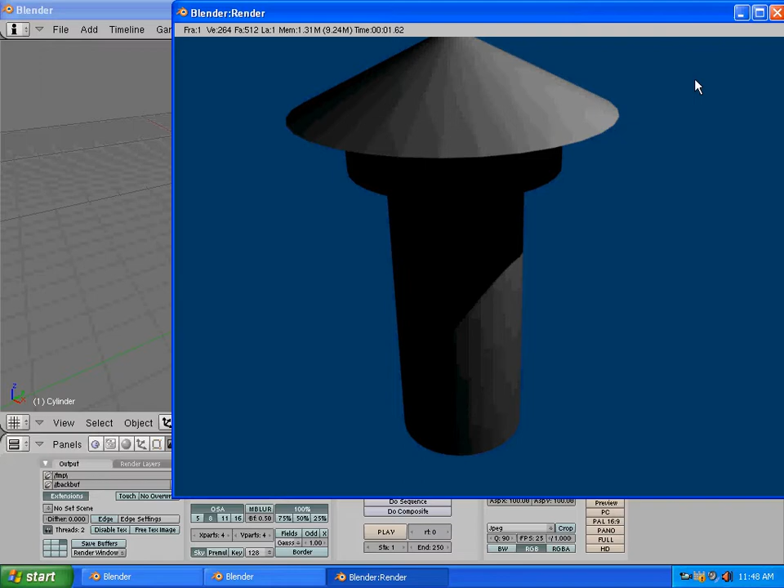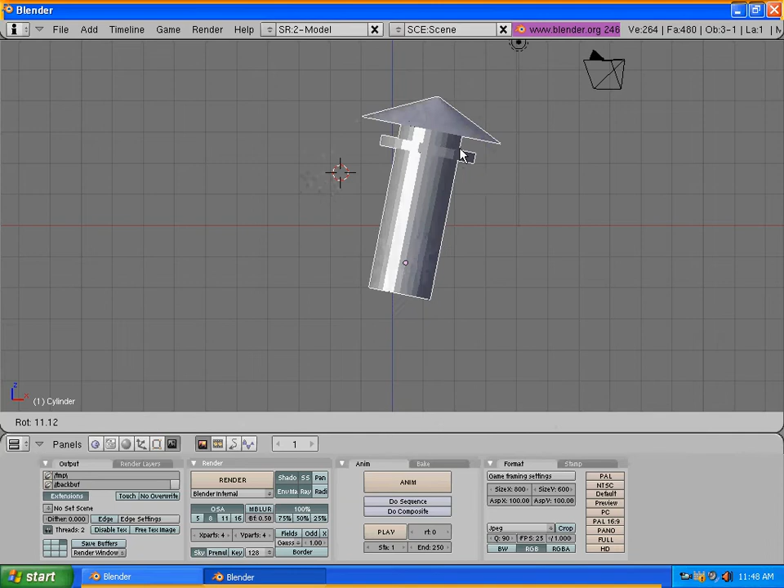Let's look at how that works. The first thing you have to realize about the rotate button is that you're rotating depending on the plane that you're looking at. So for example, if I rotate it in the 1 view, I'll be rotating it this way and that way, changing its direction this way. I can't push it back or forward, I can only push it side to side.

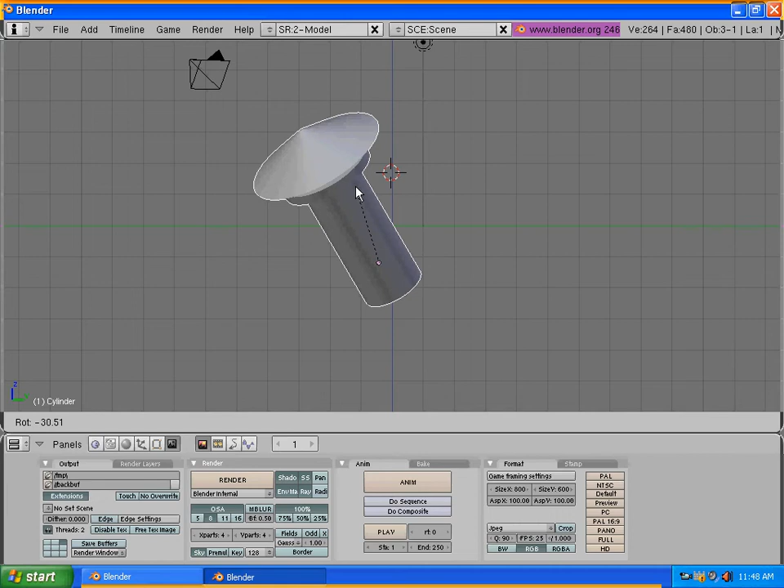But if I go to the 3 view, now I can also push it back and side to side, but this is in a different plane. So now if I go back to the 1 view or the 7 view, you can see how it's rotating. A good way to look at this is what it takes to get it back into order.

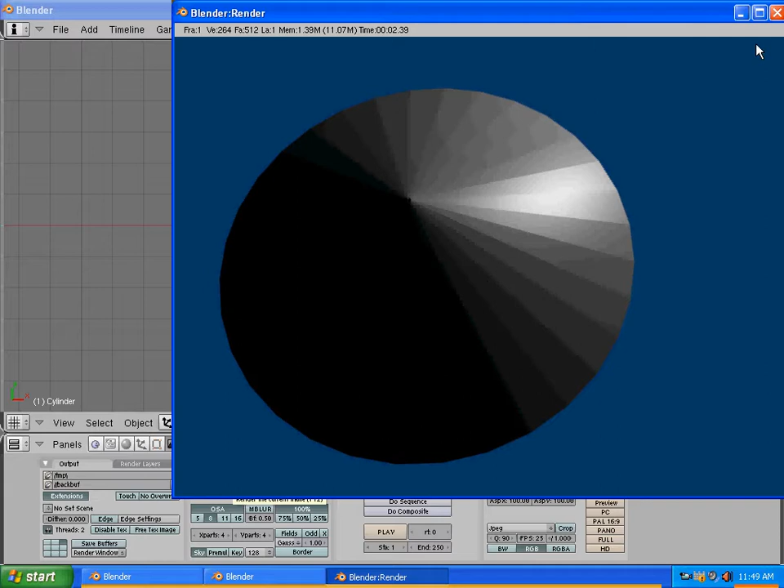First, if I view this now, I'm seeing the very top of it because I've rotated it to push it towards the camera. Let's say I want that to be back straight up and down. The first thing I would do is put it straight in all three levels. So I go to the 1 view, I hit R, I move it, and then I click.

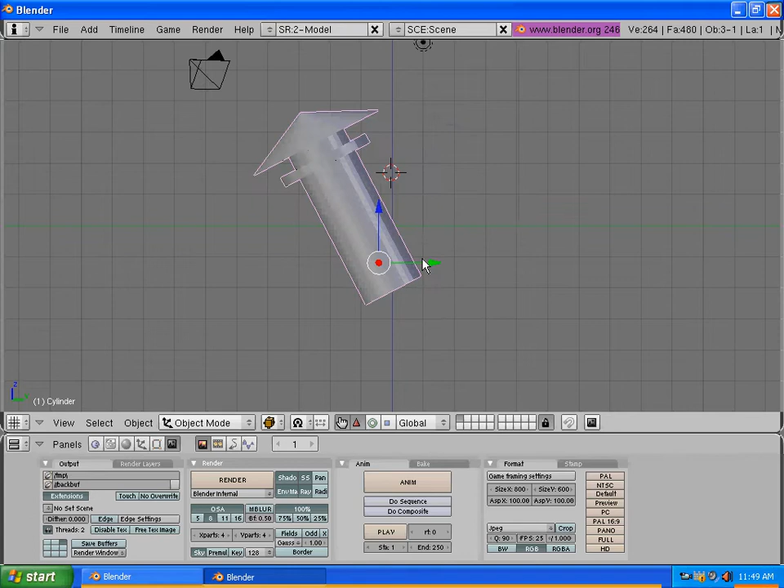Now this may look straight up and down, but it's only straight up and down in the 1 view. If I look in the 3 view, it's still to the side. So I hit R and rotate it back up.

Now because this is symmetrical, from the top-down view, 7, rotating it just spins it around, so that won't give us much of a change. Okay, so that's one way to change the orientation of the tower.

If we wanted it to be slightly tipped, we'd go to 3, hit rotate, tip it, and now if we render it, we see that the tower is leaning.

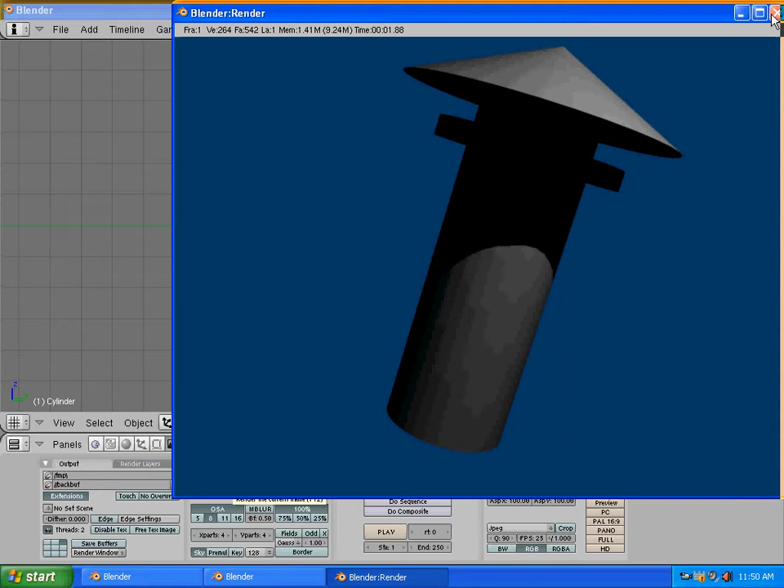Another thing you can do to change how the picture looks is grab the camera itself. Let's put the tower back straight up and down by hitting R, rotating it, and then clicking it. And this is the camera.

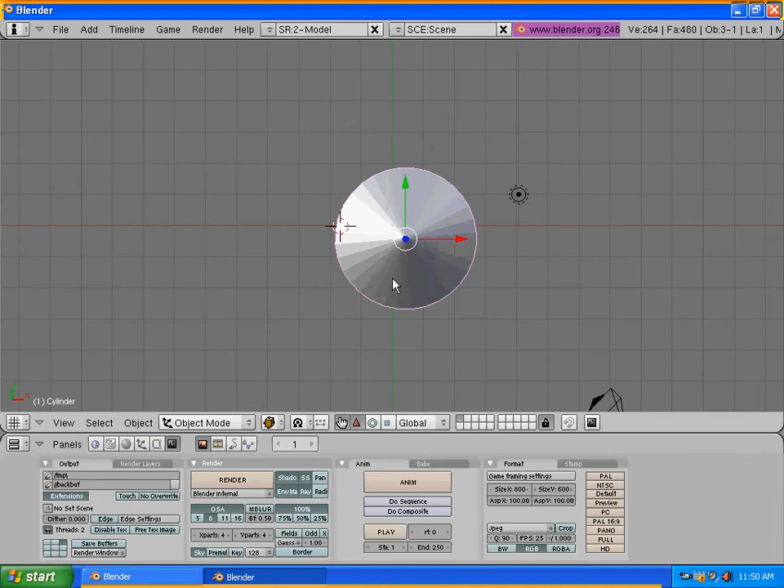So when we look through the zero view, we're seeing what this camera sees. But from the top-down view, for example, and then if I hit minus to show more of the screen, I can take this camera and click on it just like it was an object. I can hit G and move that camera.

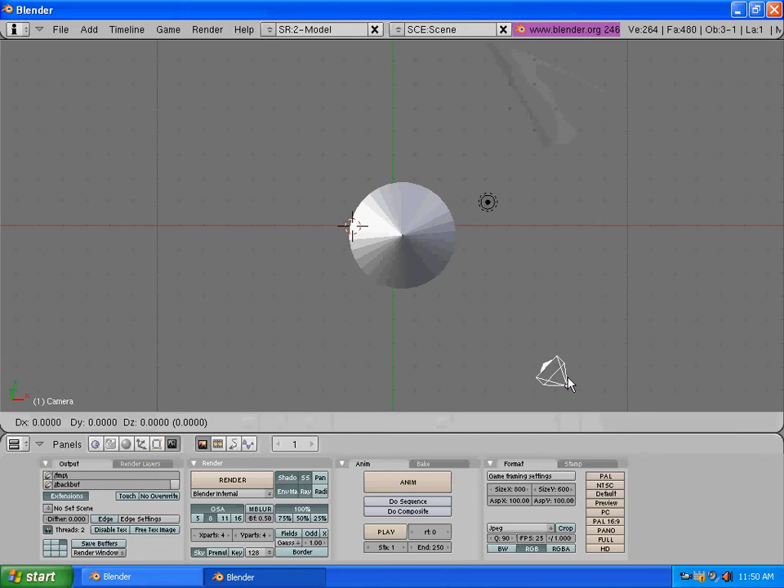So if I render it here, we'll see that the tower is in view of that camera. But if I hit G and move the camera over here, now it's not pointing at anything, and if I render it, there won't be anything on the screen. I haven't moved the tower at all, but I've moved the camera so that it's facing something that isn't there.

I can also rotate the camera by hitting R and moving it. So now I see that the camera is again facing the object, and if I render it, it'll be there again. So let's say I wanted to look at the bottom of this tower.

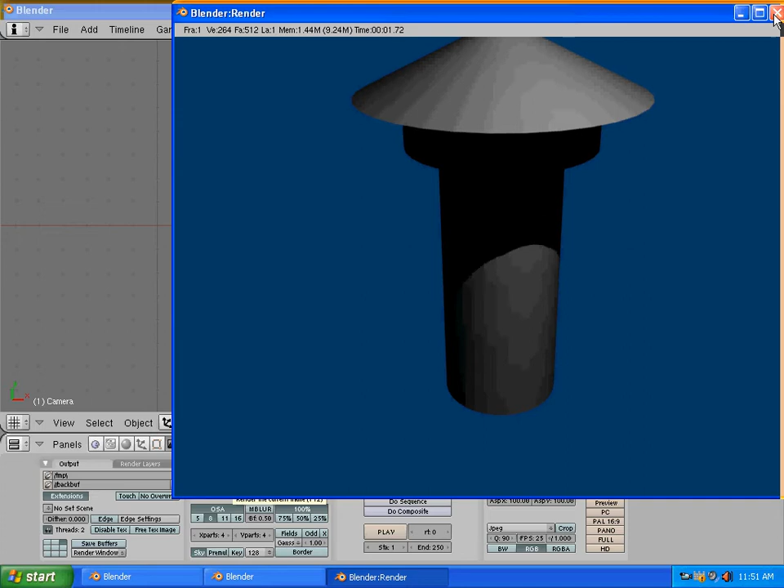I could do two things: I could either change the tower, or I could change the camera. Let's look at changing the camera.

If I go from the 1 menu, I'm going to hit G and grab the camera, and put it down here, and then hit R and rotate the camera so that it's opening up towards where the top of the tower is. I can hit 0 to see the view the camera sees, and since this is just what I was looking for, I'm going to render it. There's the view looking up at the roof, or at the tower.

Just for further practice, let's say I want to see the top of the tower. I'm going to hit 7 to see the top view, and G to grab the camera. By the way, you can always see what's selected right here: this is the cylinder, this is the camera, this is the light, which we'll get to later.

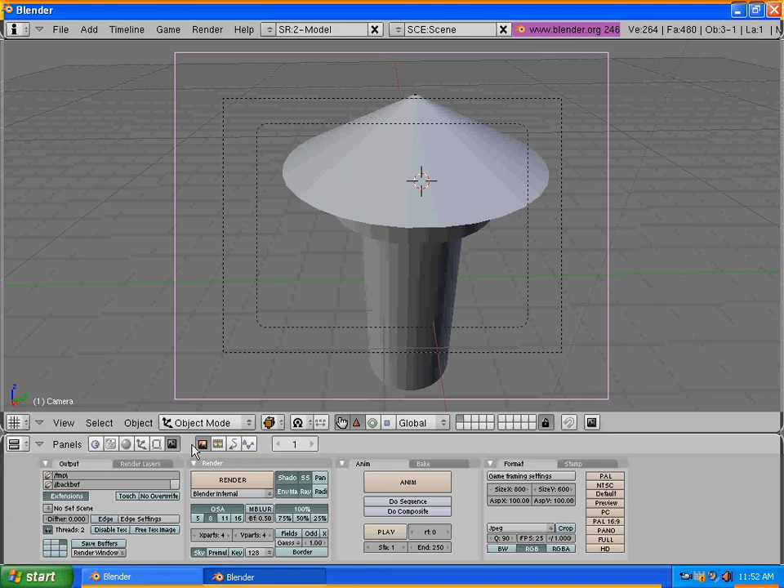Anyways, I'm going to hit G to grab the camera, and then I have to rotate it, R, to switch it around so that it's looking down. You can guess just by where it points to, and then either look through the 0 menu, or render it and see what it sees.

And if I wanted to see only the top of the tower, I would go to the 1 menu, G to grab it, and put it above the tower. R to rotate it, and then center it on the tower by G, moving it. And then I would render it.

Here's an important distinction though: just because this seems like it's looking at the top of the tower doesn't necessarily mean it is. If I look at 3, the side view, this could be way over here, and in the 7 view it's still going to look like it's looking down on the tower. Again, you've got to get your mind used to thinking in 3 dimensions.

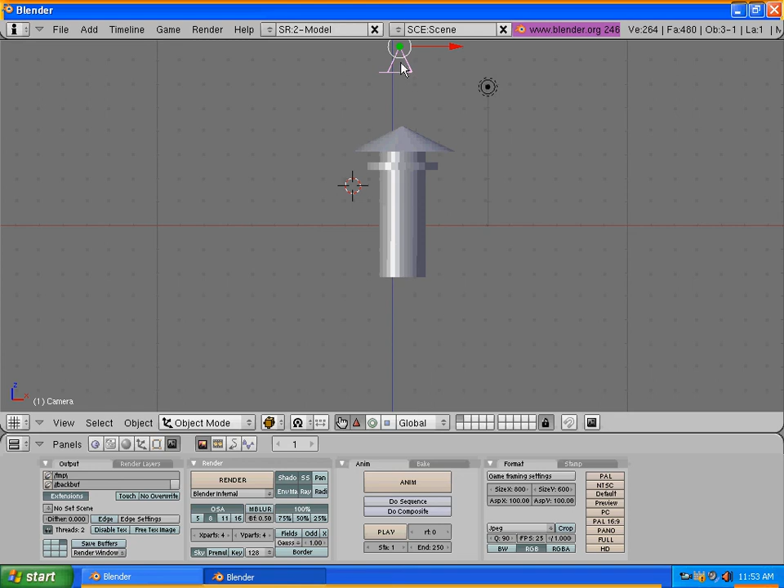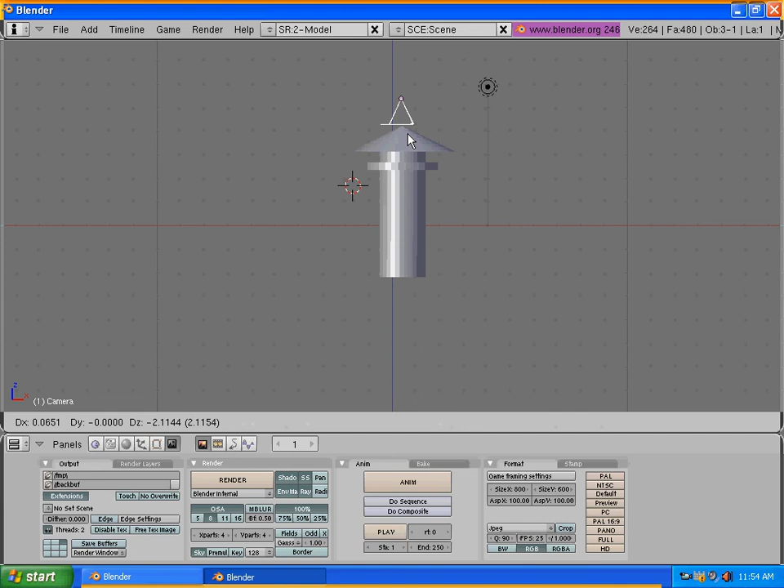But this is far back from the tower. It's centered on it, but when we look to the side, it's way behind it. So one way to fix it is to always make sure you check your top-down view, your 1 view, and your 3 view. Now in your 7 view, it is the top-down view, so here you can't tell how far away you are. Notice this looks the same as this from the top-down view, because you're only seeing it in these 2 dimensions.

Anyways, in the future, being able to move the camera around will be a good way to change and control the image that you're creating.